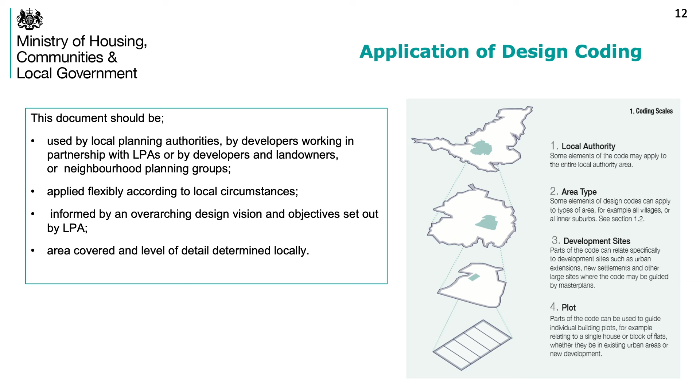Returning to the point about community engagement, this is one of the most important aspects of the coding work. We have included within the guidance notes model approaches to community engagement to ensure that communities are involved in the development of design codes, and that we do what we are committed to doing, which is bringing democracy forward in the planning system, in the plan making process.

That requires genuine community engagement and the application of techniques like workshops, charrettes, walking audits, very typically face-to-face engagement, but probably needs to be much wider in the context of the pandemic, and also in the context of changing application of digital tools. So more digital approaches in terms of multiple engagement through social media, visualization tools and digital platforms.

One of the most important things for community engagement is how we measure support at the end of that process, and we are looking for good examples of how you might achieve that. I now hand over to Jane, who will talk about the National Design Guide.

I'm Jane Dann. I'm a Director of Tibbalds Planning and Urban Design, and we worked collaboratively with MHCLG and the Design Council to prepare the National Design Guide. It was published by the government in October 2019, and it's recently been updated with some minor amendments in line with the draft National Design Code.

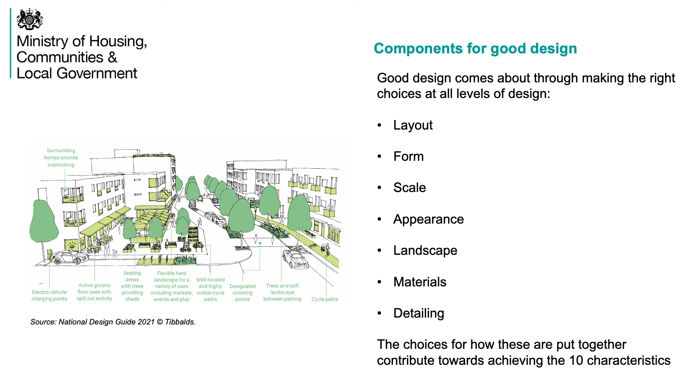And I'm now going to say a little bit more about the 10 characteristics, picking out a few highlights for each of them.

Context is about enhancing the surroundings. The key points here are understanding and relating well to the site, together with its local and wider context. This means using baseline studies as a starting point for design, and the guide lists a broad range of possible considerations that might be relevant. The second point is valuing heritage, local history and culture, which may include the significance of heritage assets, the typical characteristics of the local vernacular, or local cultural influences.

An attractive and distinctive identity. Identity comes from the way that buildings, streets and spaces, landscape and infrastructure come together and how people experience them. It's not just about how a place looks, but how it engages with all the senses. This means responding positively to existing local character and identity, where appropriate creating new character and identity, recognizing that it isn't always the right thing to reflect what is existing at present. And also creating places and buildings that are well designed, high quality, and attractive so that they appeal and aim to delight us.

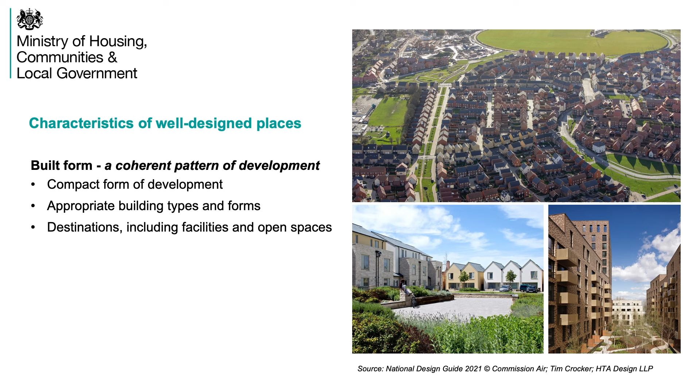For built form, the aim is to achieve a coherent pattern of development. That means a compact form of development, one that brings enough people together to support facilities and services and public transport. It also means appropriate building types and forms that are suited to the nature of the built form we're aiming to achieve. And it means creating destinations, places that bring people together that may include facilities and open spaces, such as schools, community hubs, health, etc.

Under movement, a well-designed place is accessible and easy to move around. In the updated guide, the content of this characteristic has been reorganized and the headings updated. So movement means a connected network of routes for all modes of transport, to give people the maximum choice for journeys, with a clear hierarchy of streets and other routes. Promoting active travel, and that's a new heading, around giving priority to pedestrians and cyclists and reducing reliance on the car. And thirdly, well-considered parking, servicing and utilities infrastructure for all users.

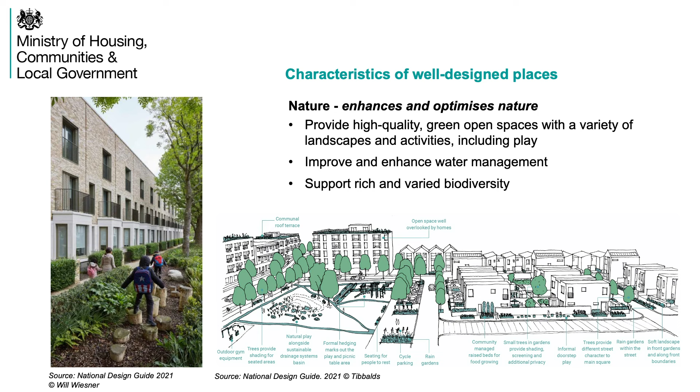The next characteristic is enhances and optimises nature. Nature includes natural and designed landscapes, high-quality public open spaces, street trees and other trees, grass, planting and water. It's a much broader definition than just open spaces. The key points here are providing high-quality green open space with a variety of landscape and activities, including play, and creating a green infrastructure system, improving and enhancing water management, including drainage and flood management, and supporting a rich and varied biodiversity to achieve net gains at neighbourhood, street and household level.

Safe, social and inclusive public spaces includes both streets and other public spaces. That means creating well-located, high-quality and attractive public spaces, open to all, and designed to include a wide range of activities for all their potential users. Providing well-designed spaces that are safe, including buildings around their edges, with active frontages and natural surveillance. And making sure that public spaces support social interaction through their siting, design, and the activities that they support.

The next characteristic is mixed and integrated uses. The key points are a mix of uses. Sustainable places include a mix that supports everyday activity, including live, work, and play, and a mix of well-integrated home tenures, types, and sizes that reflect local housing need and market demand. These provide a variety and choice of home to suit all needs and ages. In larger developments, this also includes a variety of development models, such as self or custom build, PRS, and community-led development. And finally here, promoting social inclusion.

Functional, healthy and sustainable homes and other buildings means internal environments that are healthy, comfortable and safe. This includes being fit for purpose while also encouraging sustainable lifestyles. It also includes the standard and quality of internal spaces, particularly when you're talking about higher density developments.

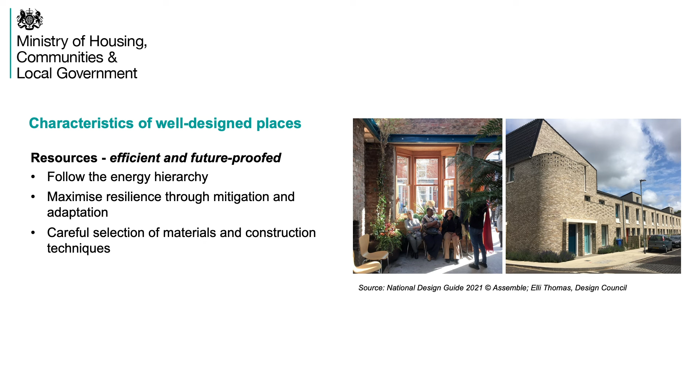Lifespan, made to last. Key points here are that places are robust, easy to look after, and can age gracefully. They're designed and planned for long-term stewardship, with management and maintenance being considered from the early stages of the design process. Homes and gardens are designed to be adaptable so they can meet the changing needs of their users over time, including changes in health and mobility, but also lifestyle changes as technologies evolve.

And lastly, promoting a sense of ownership and belonging for occupants and communities, including community involvement in the design process.

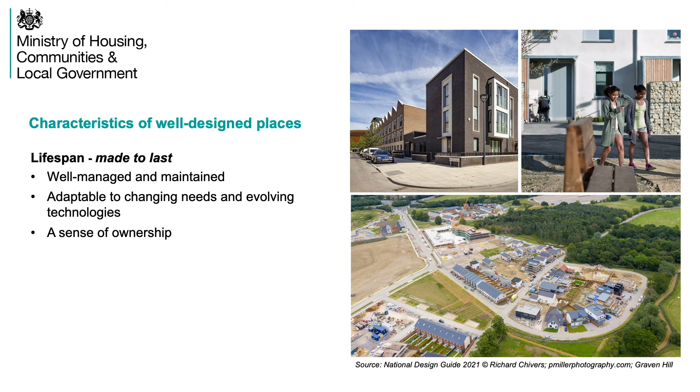We know we're in a time of rapid change, and we can see that there's much more on the horizon, and some of the impacts are more predictable than others. It includes climate change, but also the aging population, changing expectations of younger people. Ownership models are evolving, with more renting and more communal arrangements and sharing. Technology and AI are continuing to change production, manufacturing and construction. And there's a move towards electric and self-driving vehicles and other forms of personal transport, including electric bikes and scooters.

So for each characteristic, the guide includes a looking forward box. This acts as a prompt, asking a series of questions to encourage everybody involved in the development process to think ahead to how places and developments will fare as things change over time.

For example, under movement, it identifies moving away from car use for short journeys, adapting to electric vehicles and their charging requirements, and also to driverless cars. We know we already need to be thinking about how we can design places to adapt to these kinds of changes.

And finally, I'd like to touch on the presentation of the guidance. It's been designed to be easy to understand and use. It's colour coded, so the different characteristics are easy to find, and they're deliberately not numbered, as there's no natural order of priority.

Each characteristic is illustrated and ends with a composite of good practice illustrations. We initially aimed for one image here, but swiftly realised it couldn't cover the variety of situations we wanted or needed to show as good practice.

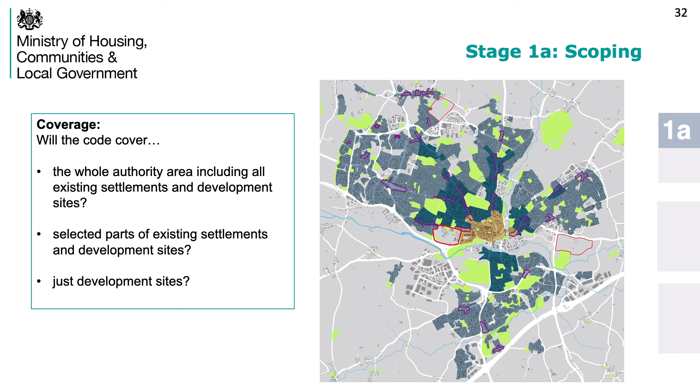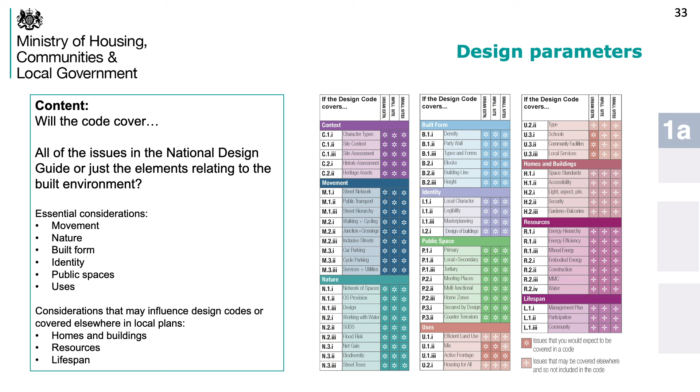The next question is about the coverage in terms of content. As Jane has indicated, the National Model Design Code follows the same 10-point structure of the National Design Guide, but it may well be that not all of those points need to be included in your design code. We would anticipate that movement, nature, built form, identity, public spaces and uses would all be included, but you may not wish to include internal arrangements of homes in terms of housing standards, sustainability measures, or management issues - not because these things aren't important, but because they're covered elsewhere in your policy agenda. So the codes may therefore just affect the external appearance and arrangements of new developments.

The initial stage will also include the plan for consultation. As Andy has pointed out, this is crucial to the development of the code. It's important to understand how you're going to organise this, the techniques that you're going to use, and also perhaps to provide training for local community groups in terms of what a code is, what it can do, and how it is important for them to get involved.

We then go on to stage 1b, looking at the baseline work that's going to inform the development of the code. Here we're probably using the existing GIS base of the local authority to create a series of plans which will become important in terms of the development of the code - particularly street hierarchy, covering the area that the code will cover, but also open spaces, local facilities, schools, public transport routes - all of which are very relevant to elements of the code.

So we come on to step 2. This is the section where we talk about the vision that the code is going to create. This is based upon the notion of area types, a term we introduce in the code for the first time. Elsewhere you might call this character areas or typologies, but area types essentially refers to areas of relatively consistent character in an urban area, which can be used to organise the way the rules and the code are organised.

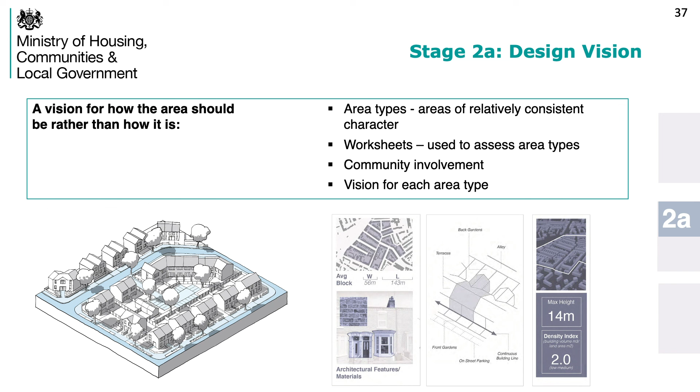Importantly, when thinking about these area types in terms of rules, we're not so much interested in what they look like now - we're interested in the vision we have for their future, how we wish the area to develop. So, for example, if you're looking at a suburban area where the local plan policy is to seek intensification, the code would reflect that intensification and provide the rules to allow that to proceed.

Having identified your area types, the key thing is then to map them. We need to know which bits of the district each area type covers. On this plan you'll see we have 10 notional area types - these are purely suggestions, and we'd expect local authorities to develop their own, which may be very different. The sort of things we've got here include urban neighbourhoods, inner and outer suburbs, district centres, town centres, and so on.

These are the sort of areas that we anticipate area types covering. They're not use-based, they are character-based in terms of their designation, and you'd put them onto the plan so you could see which bits of the city or town fall into each area type. The map also includes dotted lines, as you'll see.

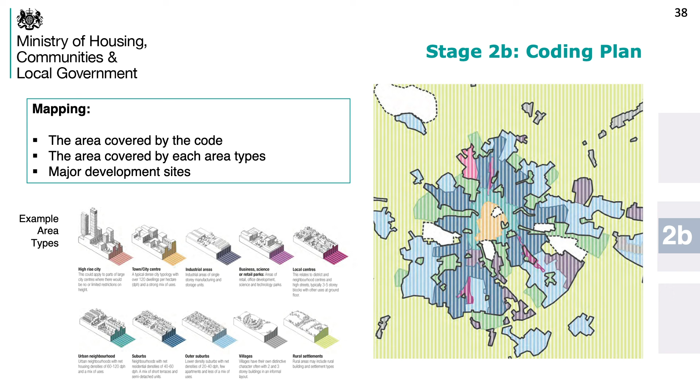These dotted lines refer to development sites, which are sites that have been allocated in the local plan. The code says nothing about where these sites should be or their sustainable location - that is entirely a matter for the local plan to deal with. The code picks up from the point when they've been allocated and will provide a framework for their development. So in order to do that, unlike the existing urban area, the development sites will need to be master planned.

It may well be the case that the developer or landowner for the site already has a well-developed master plan, and if the local authority is happy with that plan, it can be incorporated directly into the code. If no plan exists, or if the authority wishes to coordinate between different owners, then a new master plan would be generated, either by the local authority or in conjunction with the owner or developer.

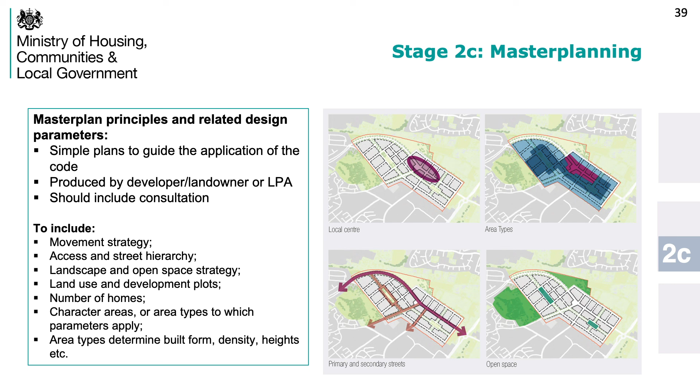At the very least, I think it would set out the primary and secondary streets. It would talk about the open space allocation, whether there's a local centre, and crucially it would designate the area types, which is what the top right plan is doing there, showing which area types would apply to this particular site.

This takes us on to step 3, which is the code, and this is in two parts. The first part are the bits of the code which vary by area type. About half of the code will be different depending on which area type you're in — issues like building height, building frontage, building line, and so on, which will obviously be different in different types.

So we use three examples in the coding just to show how this might work. Again, these are not exclusive, just examples. So we have town centres, urban neighbourhoods, and suburbs, and the coding is then set out in this way.

We have an initial introductory paragraph which sets out the issue. We then have a set of potential policies or guidance, which could be used directly in local codes. And at the bottom of the page, there are three examples about how that guidance would differ by the three different area types that we're using.

On the right-hand side, there's a summary drawing showing what happens when you bring all this together. The coding, as it says, has 10 areas. One of them is density — obviously a very important issue in terms of the design of buildings.

The code is very careful not to be architecturally specific. It is entirely neutral with regard to architectural style. It focuses instead on the principles of good buildings, which could apply whether it's a modern building or a traditional building.

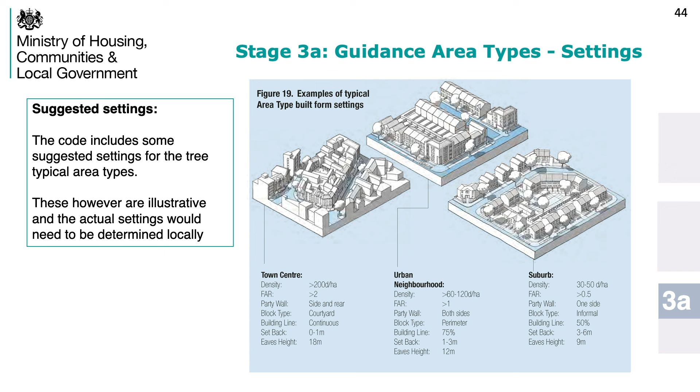We also include a whole range of street sections, looking at different types of streets and how they would be organised. This clearly overlaps with the Manual for Streets guidance, published separately. We don't say a great deal about highway engineering or how the street is organised, but from an urban design perspective, the width of the street relative to the height of the buildings and how it's organised are very important. So we show examples of that.

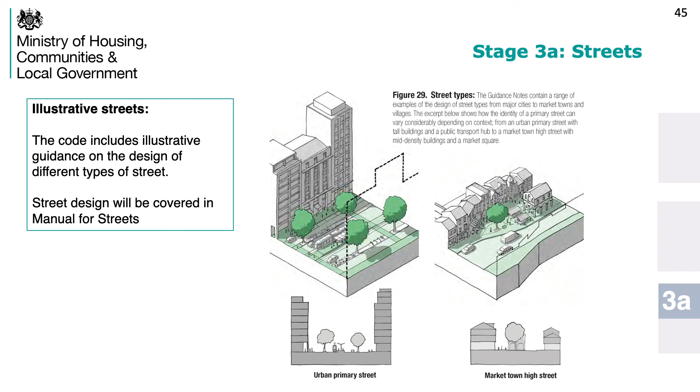This then all comes together in two matrices, which are really important. The first links the type of street, shown down the left-hand side of the matrix, with the type of area across the top. A high street in the centre of a town will be of different proportion to a high street in a suburb, and we showed the different enclosure ratios for each of those high streets.

The second matrix is something we are unable to fill in at the moment because this would be determined locally. On the left-hand side we have all the policies which vary by area type, and across the top we have all the area types.

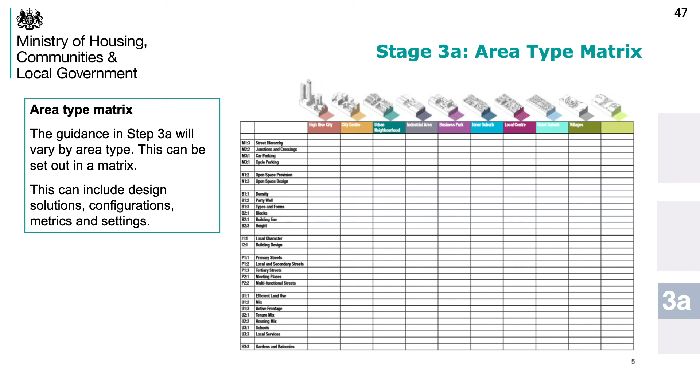The idea is that any developer only needs to determine which street they're on and which area type they're in, and they can use these two matrices to identify exactly which rules apply to their scheme and what the settings for those are.

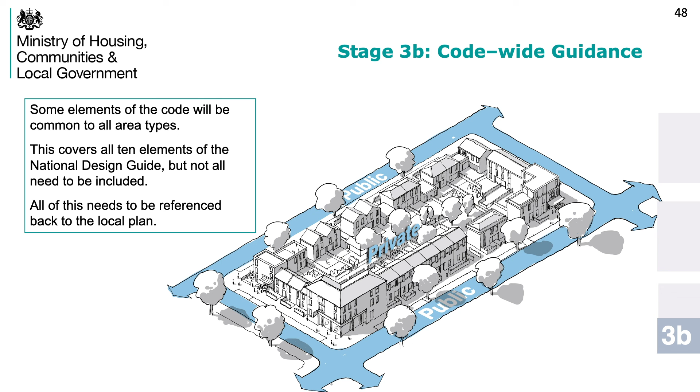The final bit of the guide talks about area code-wide guidance. These are things which don't really vary by area type. They include sustainability issues, standards with regard to housing development, but also very basic urban design things like the separation between public and private uses. About half the rules in the code don't vary particularly by area type, and therefore would be applicable across the whole of the code area.

The guidance notes—you'll have seen that on those pages in the code there are lots of cross-references to elements in the guidance. It's quite a large document, attached to the main document, and it gives a lot more detailed guidance in a fairly graphic form about the way that the elements to the contents of the code might be shaped. It covers the same 10 areas, and it's structured in exactly the same way as the National Design Guide, as Jane has talked about, and it looks like this.

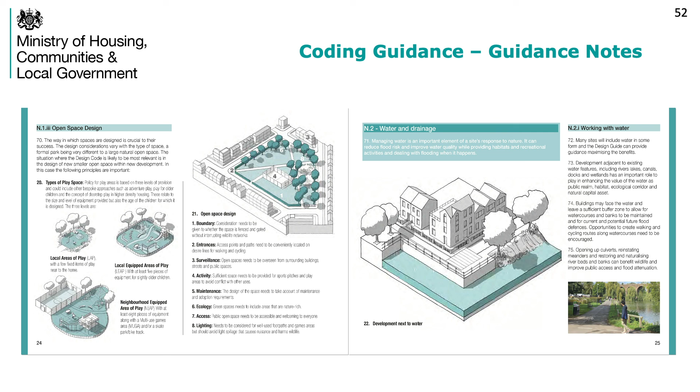It's very visual. It takes the issues from the National Design Guide and adds another layer of detail, looking at what that actually means in practice, in this case creating good playgrounds or good quality public spaces. These are just some examples of the guidance in the guidance notes for the different areas.

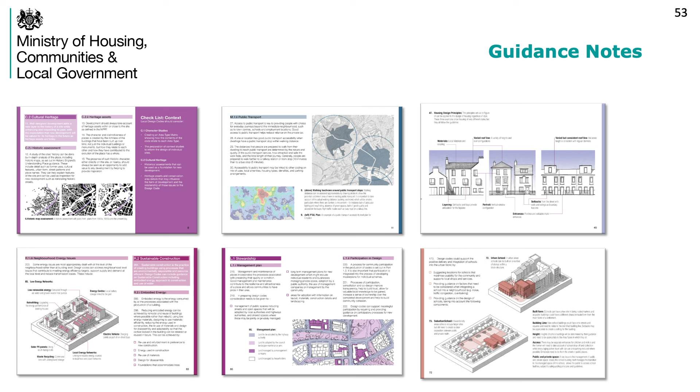So with that, I'm going to hand back to Andy von Bradsky to talk about the pilot programme.

Thank you very much for that, David. I'd like to set out what the next steps will be. Following the 8-week consultation on the NPPF changes and on the coding work, we'll be issuing a formal set of documents to apply in the current planning system.

The testing programme, launched as part of the design announcements, is seeking 10 local planning authorities to test aspects of the code work, each with some grant funding. We expect to learn how these coding processes will work in different contexts around the country, whether central urban, suburban, or rural. We want to test how the coding can be applied best in different applications of scale and types of context. We will be commissioning a further 10 pilots in the spring when the coding work is formally launched.

We will be doing that in a way that leads to a local design code that is applied in the planning system—taking it a step further and actually seeking pilots to apply it properly in the planning system. That is in the current planning system, so it's really important that we understand this is for the current NPPF. We will obviously have some learning that will be applied to any reform planning system by the time we've undertaken the testing and further pilots.